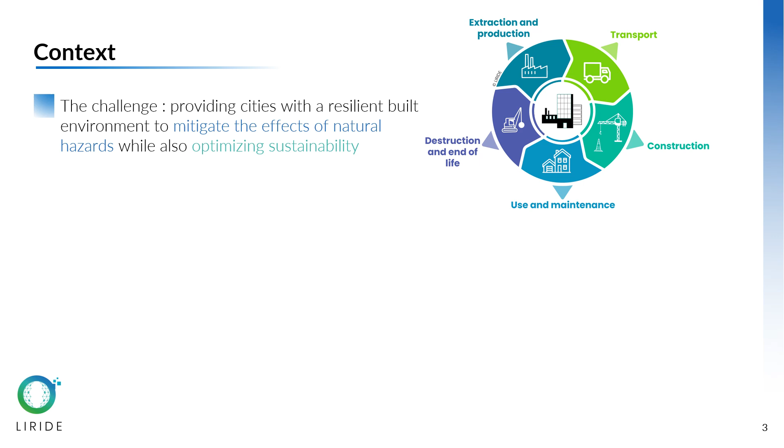Another point to bring up is that this project is not the first one to look into measuring the sustainability of natural hazard resilient cities. There's already been work in that direction where essentially it is broken down into 4 steps. One of them is measuring the hazard on site, how the structures respond to this, then moving on to what are the damages entailed, to figuring out how to repair the structures and thus define the amount of environmental impacts associated with these repair activities.

It should also be noted that while the discussion is going to be mainly focused on one singular hazard, this framework can always be adapted to other types of hazards, such as flood-related, fire-related, wind-related, or ground-related hazards.

The research gaps that this project aims to tackle are that current frameworks and tools enforce technical limitations to LCA. That is, for example, simplified lifecycle inventory modeling, where it is not possible to modify the data sets or even have access to process-based LCA. It's also to have access to other modes of LCA beyond attributional LCA, for example, having access to consequential LCA in modeling resilience needs.

If we're going to also move into more advanced LCA, it would be interesting, for example, to use conventional generic LCA software, but they tend to become much more cumbersome when it comes to interoperability. That is, moving all these data that come from the previous assessment steps into the LCA itself is very challenging, and it's very data intensive to bring this information into the LCA.

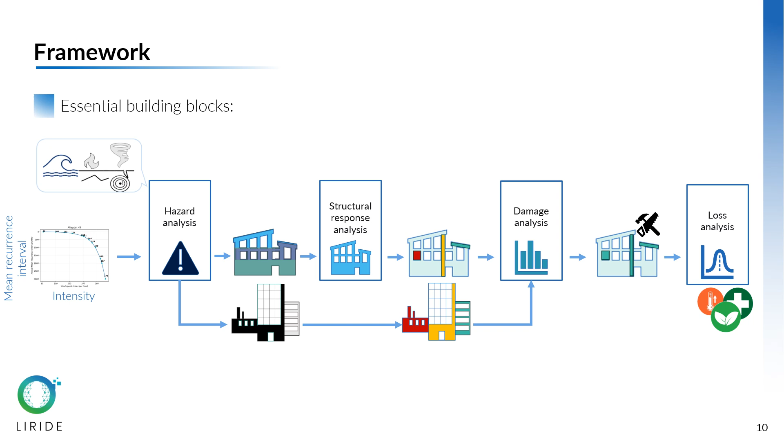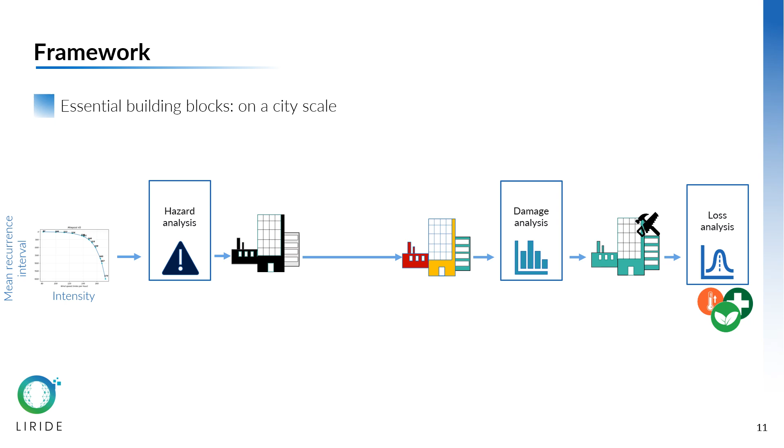Now, there's also an alternate way to see this. Instead of going component per component in the building to define the environmental impacts, it can be interesting to go at the whole building scale, the whole structure perspective, where we're going to instead take a set of buildings and define whether they are minorly damaged, moderately damaged, or severely damaged and need to be replaced, for example. Obviously, on a city scale, we're going to follow the whole structure perspective because of the numerous buildings the assessment involves.

Now, for our specific case study today, we're following buildings in a neighborhood in the city of Halifax, Canada, where we derived a hazard curve for a hurricane. The next step is to discretize the hazard curve into 18 bins, or 18 wind speeds, and find the associated likelihood for each of these wind speeds.

And then we connect this with 20 buildings that were taken from BRAILS. BRAILS is a NHERI SimCenter software that essentially goes on Google Street View and, for the location we give it, finds all the buildings in the area and tries to find some features on these buildings, such as the number of stories, for example.

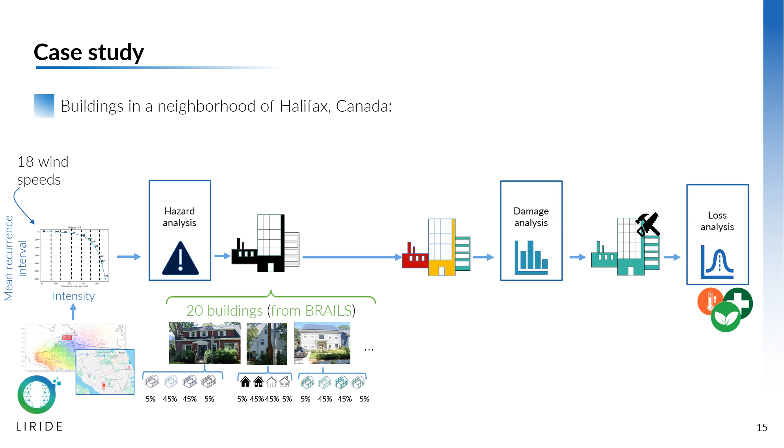Now, obviously, we're not going door to door to verify the structural detailing of all of these buildings, but the framework is also able to account for this type of uncertainty by assigning more than one archetype per building and flipping between these during the simulations.

Once we have the wind speeds and the buildings, we can actually send in, for example, 10,000 simulations per wind speed to get a good feel on what are the expected damages this neighborhood will sustain under these different wind speeds. Now, for demonstration purposes, we're going to look at the damage states according to the wind speeds, and we're taking a sample of 3 wind speeds.

So one on the far left is going to be the lowest wind speed we can have in the model, while on the far right, we're taking a data point that is the highest wind speeds we might get, and something in the middle to get a sample of damage states for demonstration.

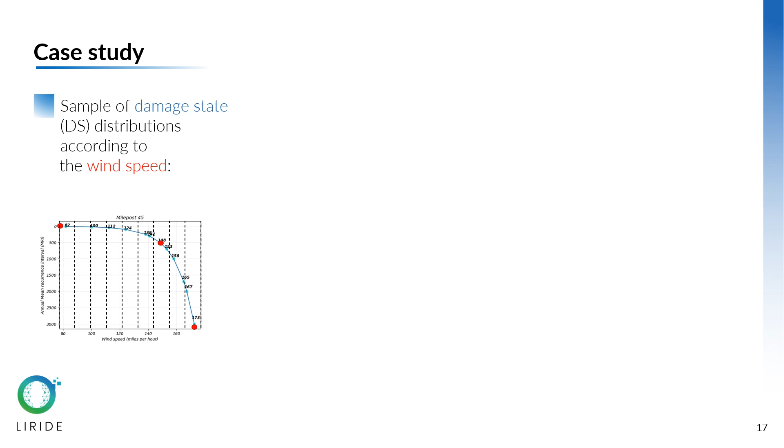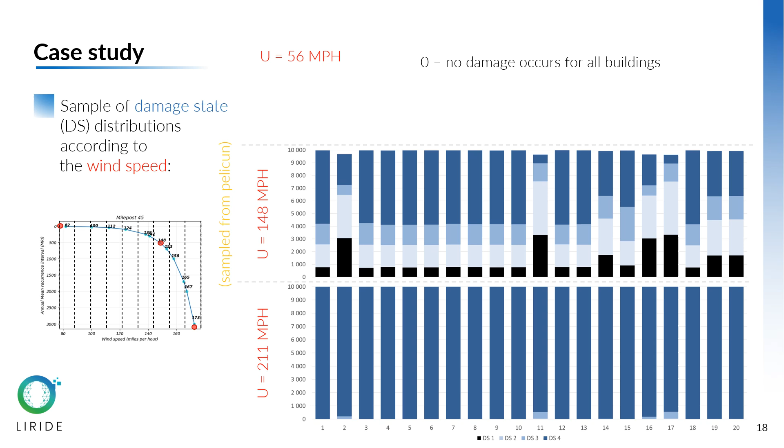With all these thousands of simulations, we're now ready to move these damages into the LCA part of it. For this purpose, we developed a Python library that automates the meshing between the natural hazard damages and the LCA datasets. Essentially, it takes all the potential damage states that exist and creates empty datasets that we're filling in with ecoinvent datasets, and then automatically takes care of the rest in mapping the simulations and the resulting damages that we get in each individual simulation into a Monte Carlo simulation. And the underlying background engine is Brightway.

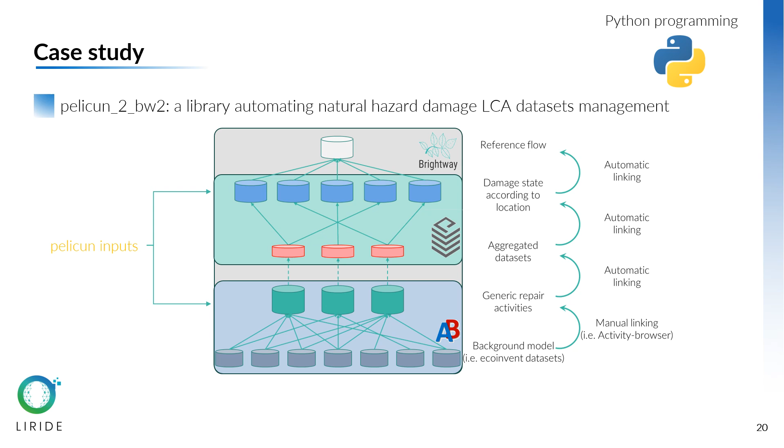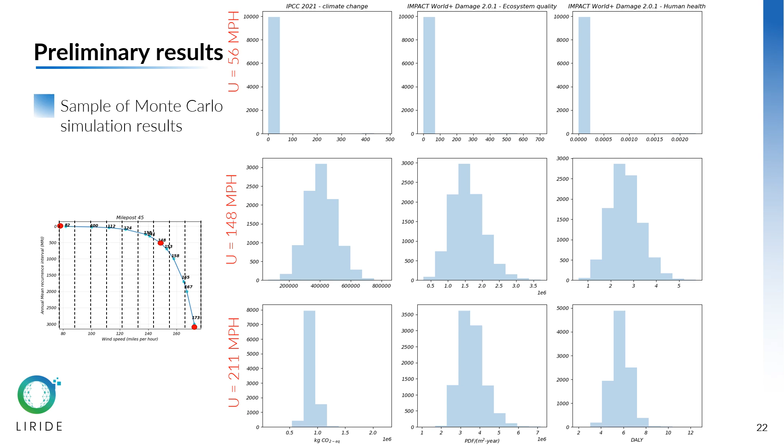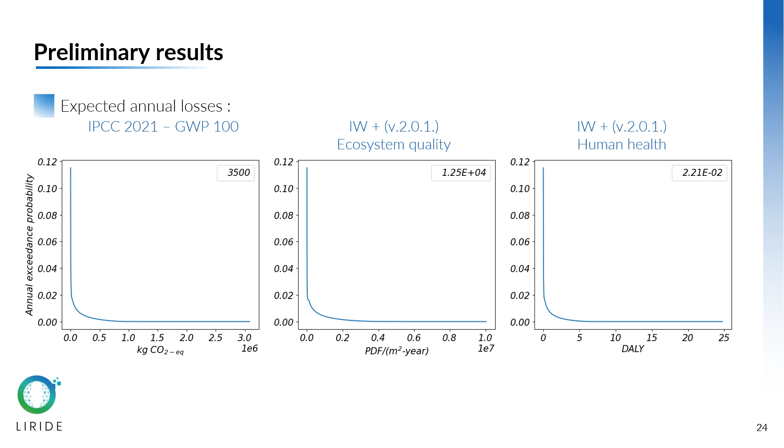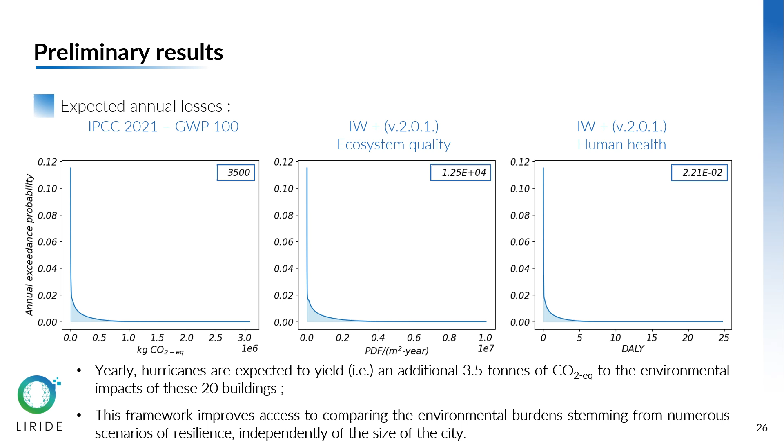And the most interesting part of this is to do the area under this curve here, and that's where we get the numbers on the top right of the graphs. And this can be read essentially as, when we integrate this, yearly, the hurricanes are expected to contribute an additional 3.5 tons of CO2 equivalent to the environmental impacts of these 20 buildings. And what's interesting with this framework is that it improves the access to comparing environmental burdens stemming from numerous scenarios of resilience independently of the size of the city.

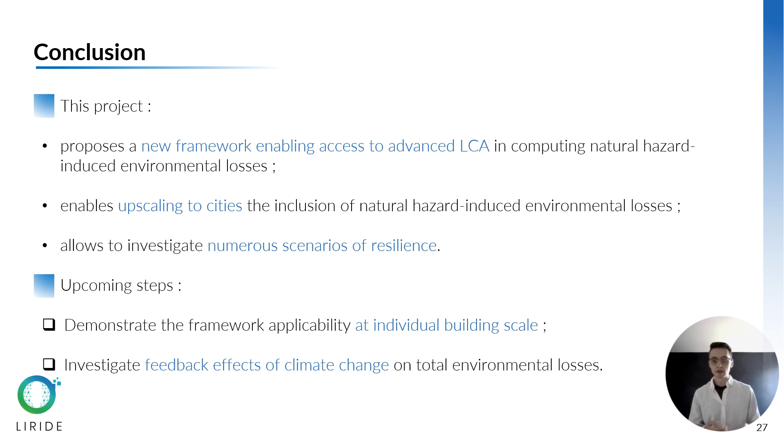So in conclusion, this project proposes a new framework enabling access to advanced LCA. It is able to be upscaled to the size of cities, and it allows us to investigate numerous scenarios of resilience. The upcoming steps would be to demonstrate the framework applicability at individual building scale, so going component by component in an individual building, and to investigate the feedback effects of climate change on total environmental losses.